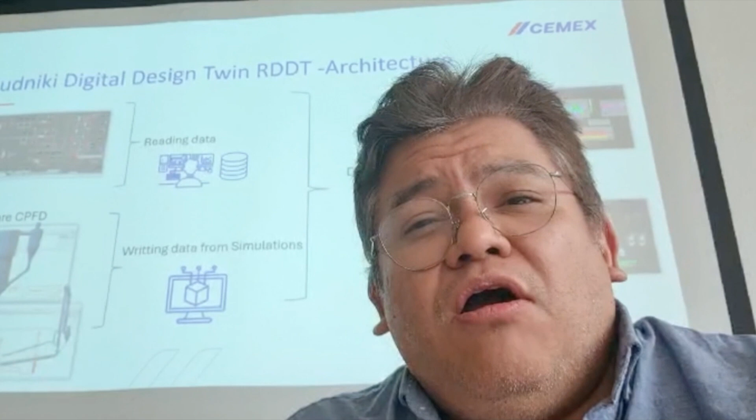As part of this journey, CEMEX has started implementing new ways for digitalization with new designs. As an example, today we are going to explain the topic of the Rudniki digital design twin that we have been working on together with Barracuda software, where we are going to be using and controlling some parameters from our operation side in order to develop new technology.

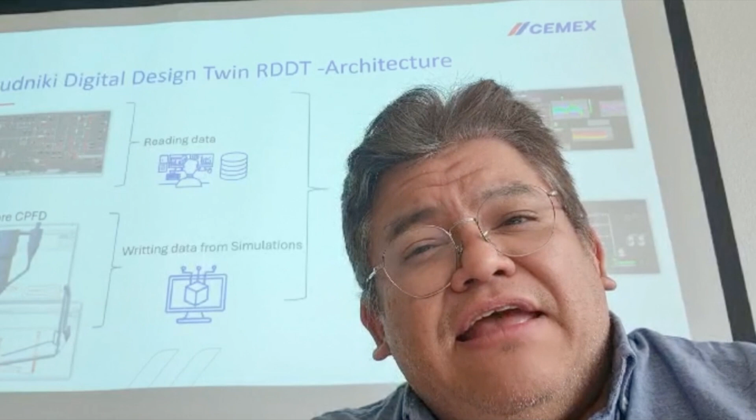What is the purpose of that? Very simple: we are going to be connected in real time to the control room operation in order to transfer the reference in a virtual way and also evaluate simulations with new technology. All the simulations will receive real-time information from the plant side, generating new virtual parameters, which can be compared at the end of the simulation with the real situation of the plant.

What is the advantage and purpose of that? The advantage is that our operations will have the opportunity to validate a new project, a new design, at one of our plant sites. This gives them the advantage of knowing how the operation could be, and how the CO2 emissions would be at the plant site if they install a new design with this type of technology.

So the advantage of this is to develop to the next level. The next level will bring all the virtual designs before they are built, and allow decisions to be made at the right time, before any capex investment. That gives the plant sites the opportunity to decide what is the best design for their installation according to their specific circumstances.

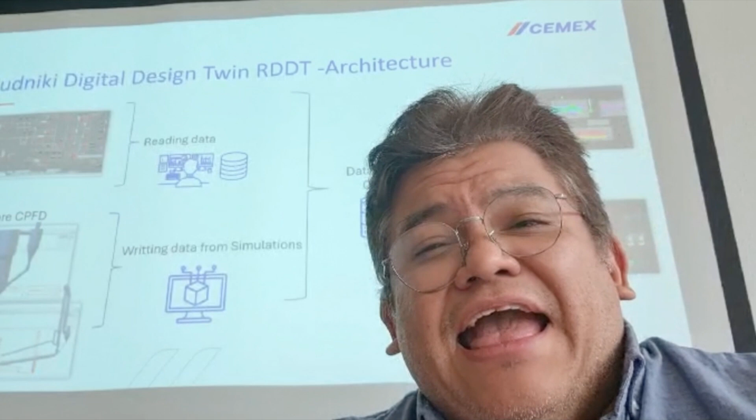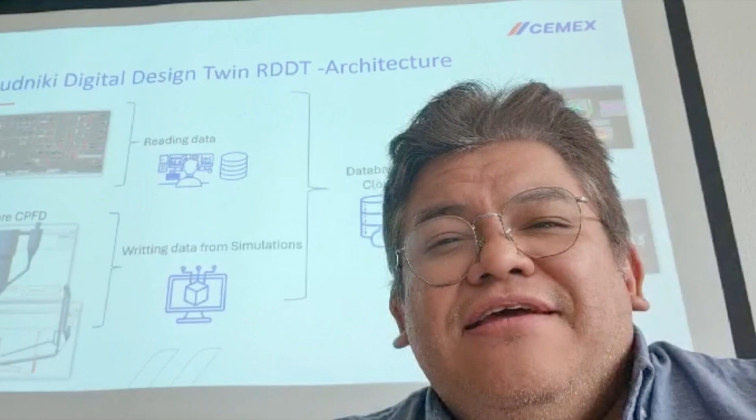In this journey today, we are going to discuss the Rudniki plant site, where we will be simulating one of the gasifier technologies. For this journey, we are happy to share the reference of three persons: Piotr Bebelowski, our plant director from the Rudniki plant site in Poland; our colleague Carlos Eduardo Marquez, who will share how the CPFD simulation is being done from our installations in Monterrey, Mexico; and Jorge Moncada, connected from Switzerland, who will review all the parametrization and validate the control and connectivity of all the parameters from the software and from the control room.

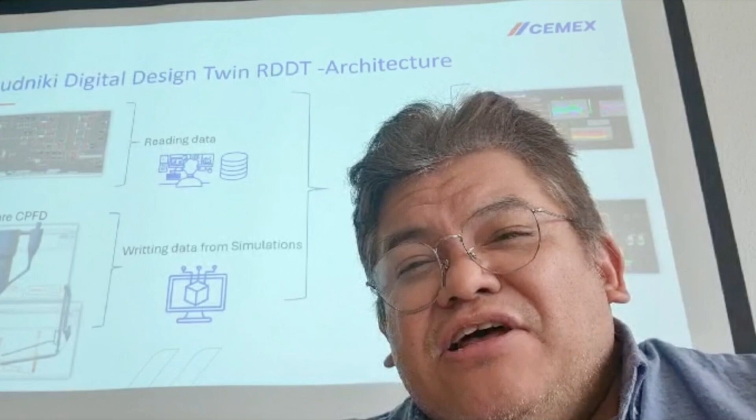So the big challenge is that all the simulation will be performed in real time. That is part of this journey. Now I would like to share the reference.

My name is Piotr Bebelowski, and I have been the director of the Rudniki plant, located in Poland, for over 17 years. The plant has been part of CEMEX since 2005. Rudniki is located in the northern part of the Silesia region, Silesia province, the most industrialized area of Poland. Our process has been based on using waste raw materials from other industries for over 15 years, which allows us to maintain a high proportion of waste raw materials used for cement production—currently 46%.

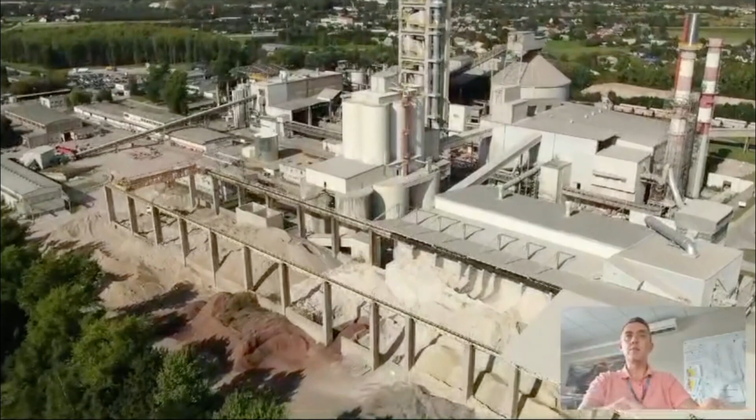The plant was modernized from 1999 to 2001 as a first stage, mainly focusing on dedusting installation, raw materials preparation including raw mill modernization at that time, cement finish mills, and the storage, shipping, packing, and palletizing system. A very important direction we have been pursuing in Rudniki since 2007, and very interesting, is substituting heat from coal with that from alternative fuel.

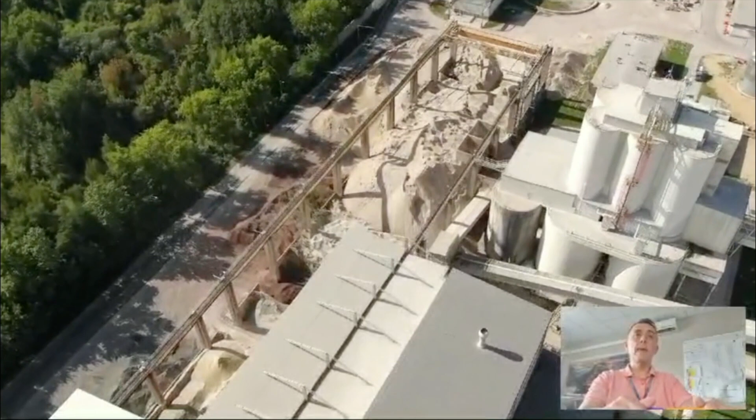Following the kiln modernization in 2019, it was the second stage of modernization where we modernized the head of the plant, the kiln line. We managed to achieve 92% of heat substitution with waste-derived fuel after 2 years of gaining experience and optimizing areas on the old installation, the old kiln.

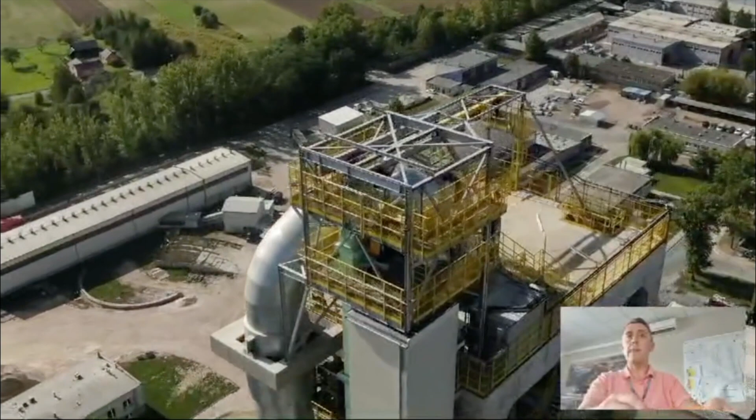We could achieve only a maximum of 52% substitution, having at our disposal only the main burner. The plant now operates on a 5-stage preheater tower with a modern calciner with a very high retention time, 7 seconds, which has significantly improved the heat exchange conditions, reducing heat consumption by 30% versus before the modernization.

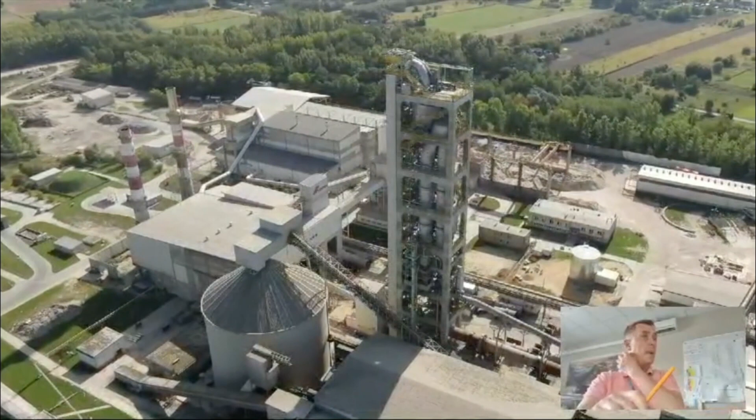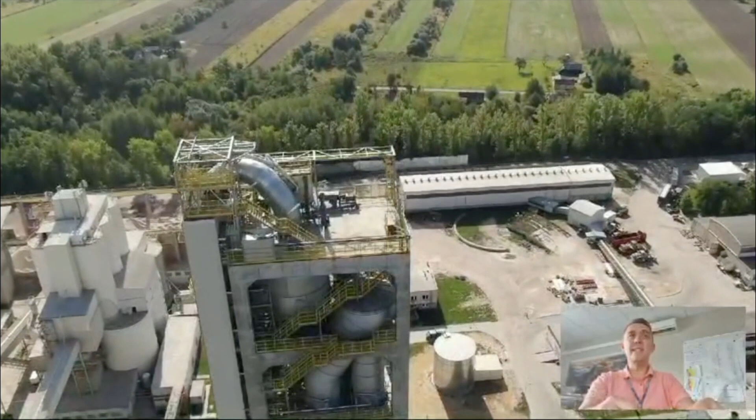Alternative fuel, taking into account the biomass content in Poland, is in our case about 35%, and this optimized heat consumption to make clinker has allowed us an 18% reduction of CO2 emissions, our carbon footprint per ton of clinker. It is worth emphasizing that this high alternative fuel usage rate allows us to avoid burning about 50,000 tons of coal each year.

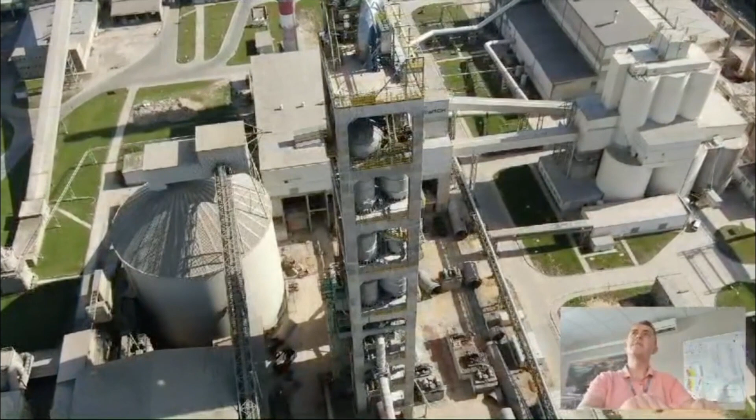Another area of our intensive experience and work is currently the reduction of the clinker factor, especially because, as I mentioned before, we are located in a very industrialized area of Poland with very broad access to different waste raw materials from other industries, in which, due to technology and location, we have specialized for years with the usage of this material.

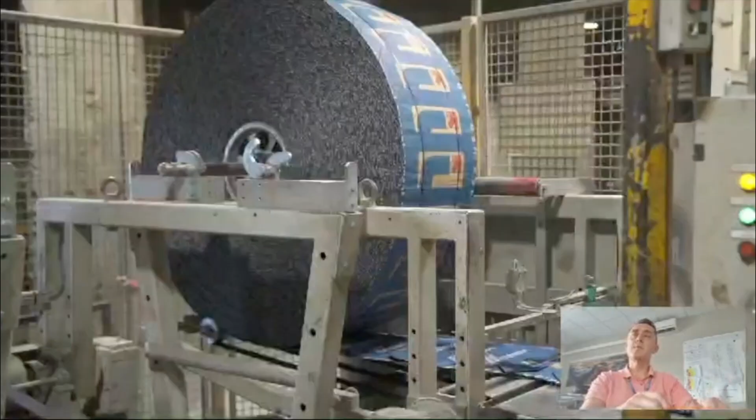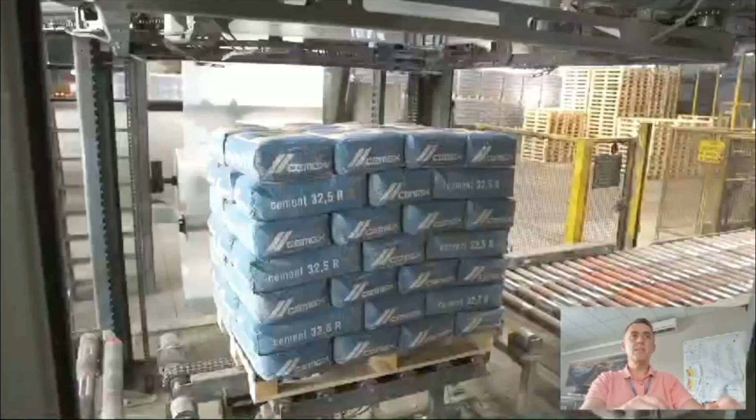All of these efforts I tried to enumerate before are included as part of the decarbonization roadmap of CEMEX. CEMEX is implementing the most important program called Future in Action, and this roadmap is included in this program. We see a great opportunity to use digital technology, which could be based on our process and operational quality data, available in almost real time through our PI system.

I see special space for optimizing the combustion conditions for alternative fuel in the main burner, so that we can approach almost 100% of the level of heat substitution with alternative fuel. This is for us right now one of the main challenges.

Another interesting area of analysis is the further reduction of heat consumption or minimizing the negative impact of the circulation of volatile substances in the kiln system. Another, slightly more distant, area that is extremely important to us is the use of digital technology simulation to optimize efficiency or carbon capture processes. This is right now a topic in which we are keenly interested.

Thank you very much for your attention.

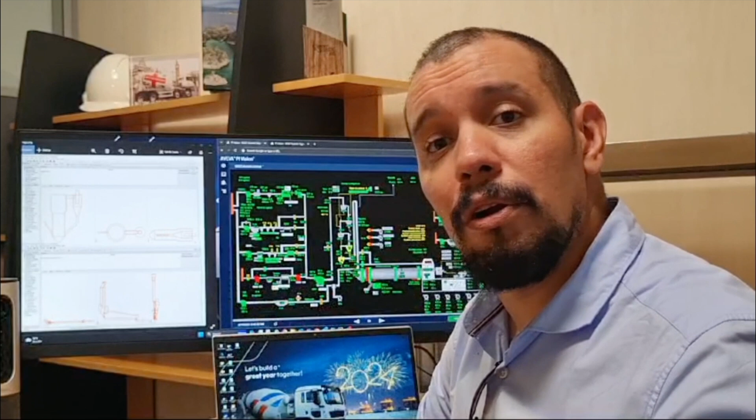The connection between these equipments happens, first of all, by observing the plant. When we have the plant, we have a central control room where our operators are located, and from that place we are able to control the entire process cement line. What's interesting from this point is that we are able to collect all the data from each process, sensor, and instrument measuring every part of the line, preheater, kiln, etc.